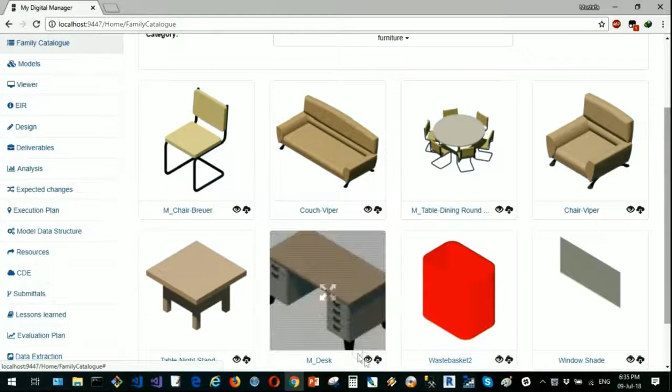So by opening the categories, we will now find a list of the categories that have been identified by the add-in from the RVT file. And if we go to the family catalog, we will find all the categories identified, and beneath them, all the families that have been extracted. And thanks to the Forge Model Derivative API, we can now extract the thumbnails directly from the families. And we can also use the Forge Viewer API to display the families.

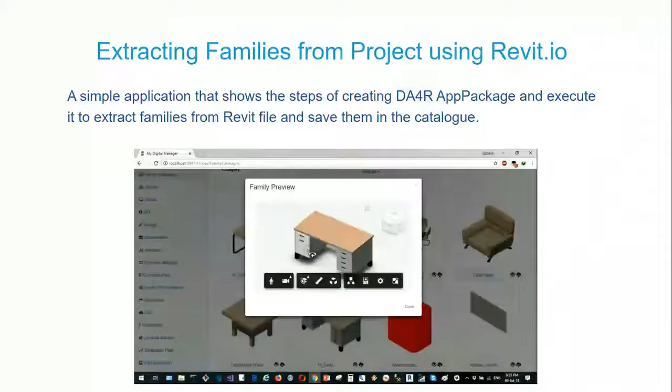So in order to get all the extracted families as output, we will put them in a folder, compress them, and then upload them into an S3 bucket. Once the upload process is complete, we will execute a Lambda function, and the Lambda function will start to extract the compressed file into a different bucket. And once the extraction is complete, another Lambda function will be executed to upload all the extracted families to a Forge OSS bucket.

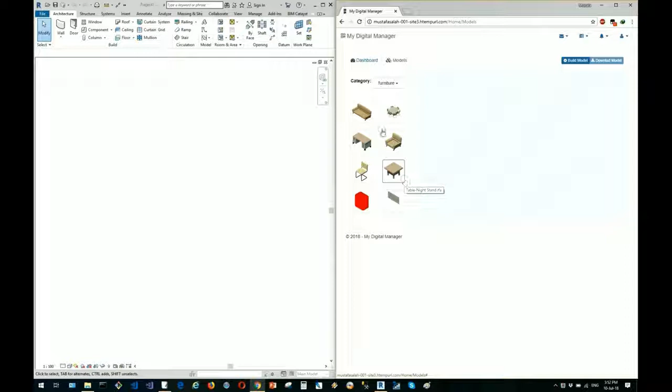So first we go to the categories and select the desired category, and then we will start to select the families that we want to insert in the template as samples. And as we can see now, we can directly put it in the Forge viewer, and the user can change the position and change the orientation of each instance.

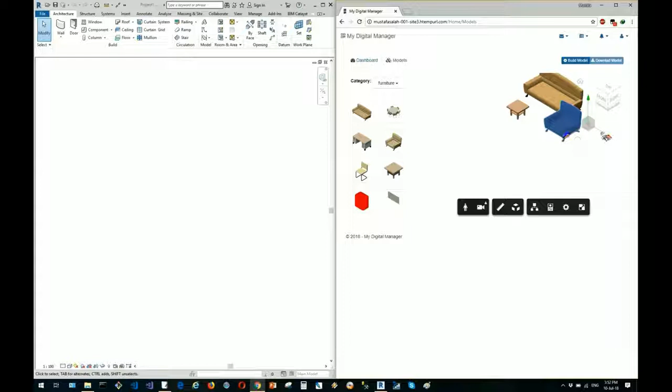And by that way, we can make sure that all the families are standardized according to the corporate standard. So we don't need to take care of the naming convention or the scale or the orientation of the 3D view thumbnail, for example. Now we trigger the work item that will create the RVT file on the fly and insert the family instance in the same location.

And once the creation process has completed, we are now ready to download the file. So we are now downloading the file. And we will open the file in Revit for more verification.

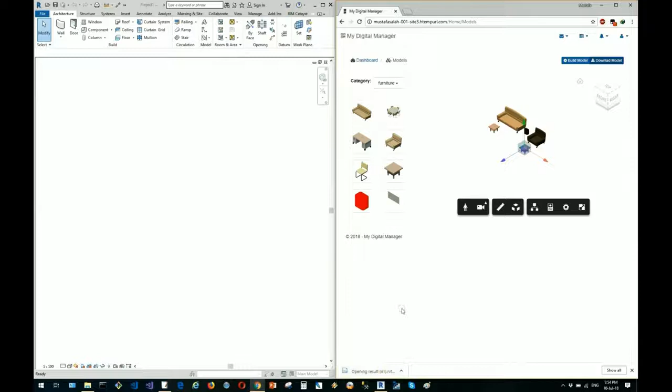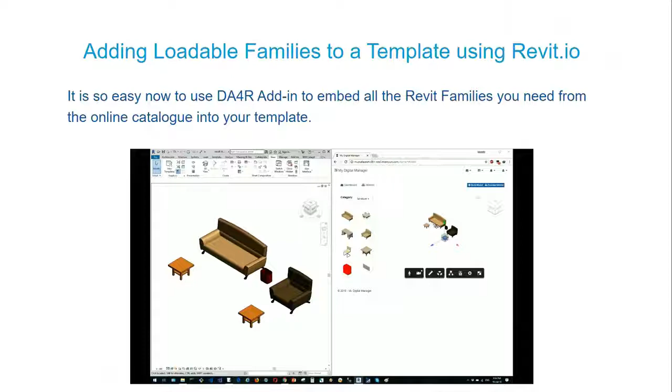Okay, so in this application, we will talk about the most annoying task when we are starting up a new Revit project, which is defining the new system families types. Now with using Revit.io, we can easily define new system families types on the fly. And we will show this in this demo. And by creating the system families using Revit.io, we guarantee that all the system families types will be centralized in one location, and it will be easily maintained and updated.

So as we can see here, we can now create walls, floors, ceilings, and roofs. And I will go for creating a wall type. First, we need to supply the wall type name, and then we configure the structure of the layers. So we select the functions, the materials, and insert the thickness. And then we can even change the order of the layers.

And by the way, all the information we have seen here is coming directly from the RVT files. So they are not stored in an external database and then read when we are executing the application. Instead, we are using Revit.io to directly access the information from the RVT file on the fly.

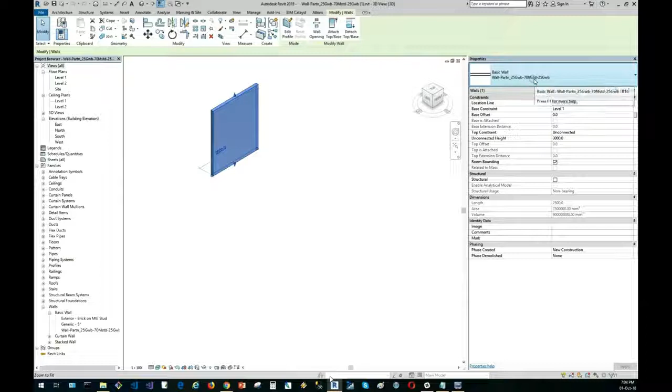So by selecting the wall, we can check the naming convention, and by editing the wall type, we can find all the structure of the layers that we have defined.

Okay, so now as we have a system families catalog, we can also use these families to create templates with samples of the system families. And this application has been done by Raul from the DA4R team. And we will see now how we can use the Revit system families to add samples to the Revit template.

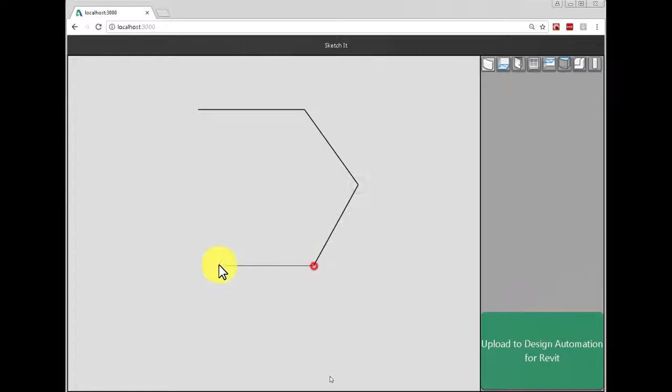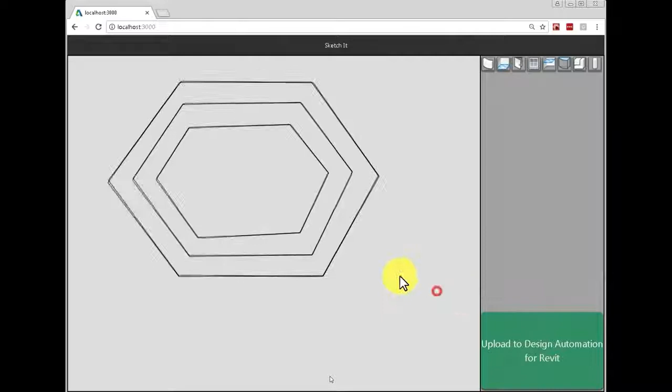So by selecting the system family type, we will go for the wall and start to sketch the center lines of the wall. And now we select the floor and start to sketch the boundaries. And once we finish the sketch, we will execute the work item that will create the Revit template and create all the model elements inside of it.

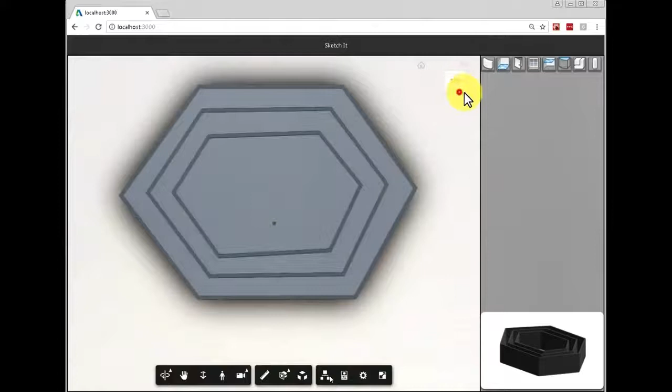Now the creation is complete, and we can display the result in the Forge viewer. And once we check everything is okay, we can download the file and open it in Revit for further verification.

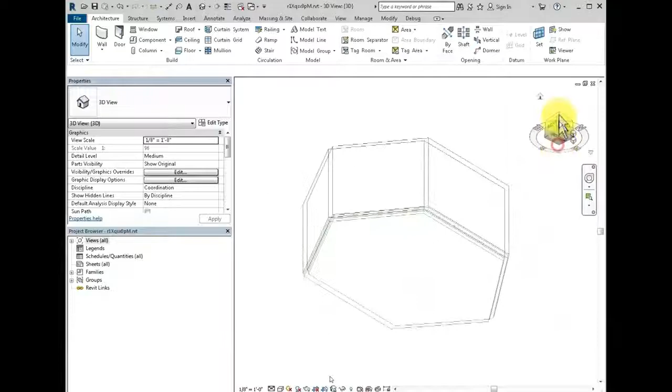Okay, so in this example, we have used Revit IO to make inquiries directly from the Revit models. To check the model health, there are a lot of indicators, and one of them is the Revit warnings. And by checking the status of model warnings, we can enhance the performance of the Revit model by solving the issues and minimizing the errors. So in our portal, we can now inquire the warnings directly from the Revit model and display them in different types of graphs.

This will allow us to have better insights about the model performance, and let us give notifications to the modelers to solve the issues indicated by these warnings. Or even better, if we could train some machines with AI, the machines can find the solution for these issues, or at least provide us with a list of suggestions for solving these issues.

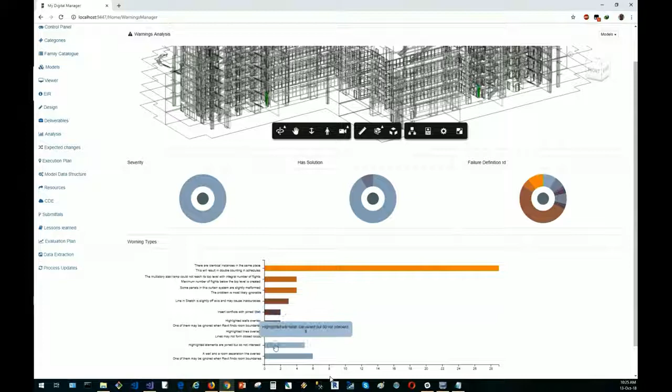So in our application here, we can group the warnings by their severity, or by their types, or if they have a solution or not, in different graphical shapes. And by selecting any bar chart or segment of the donut, we will be able to indicate the model elements that are causing this warning in the Forge viewer, and do further investigation in the Forge viewer.

This project is consisting of multiple segregated models for each discipline. And by selecting each discipline, we are executing the work item that will run the Revit IO add-in that will retrieve all the warnings from the model directly and then present them in the graphical format.

Okay, so in this example also I will show you how we can use Revit IO to digitally build a dashboard for our Revit content. One of our projects was a master plan project where the client needed to display visually the GIS information of some plots to help him take some decisions. Using Revit IO, we were able to directly extract the information from the Revit model, using a work item where all the GIS data were stored, and we recall all this information and display them in different graphical shapes.

The Revit file consists of multiple masses, and each mass represents a different type of building. And there is some set of shared parameters assigned with each mass to define certain values of the GIS information. So basically, this is our master plan, and initially it is color-coded by the main use. And each donut chart here is representing some criteria of the GIS data.

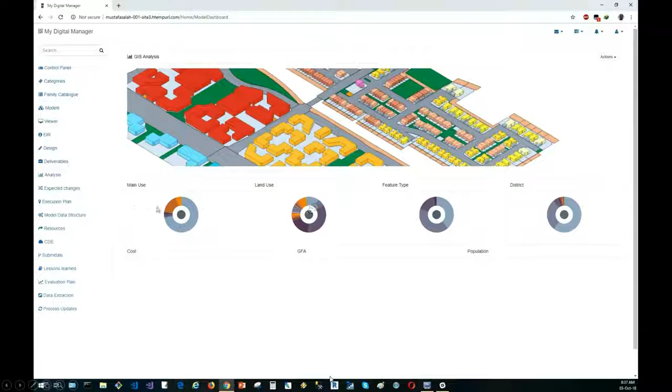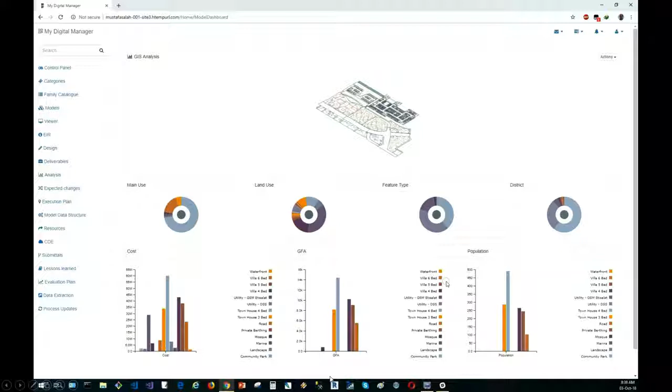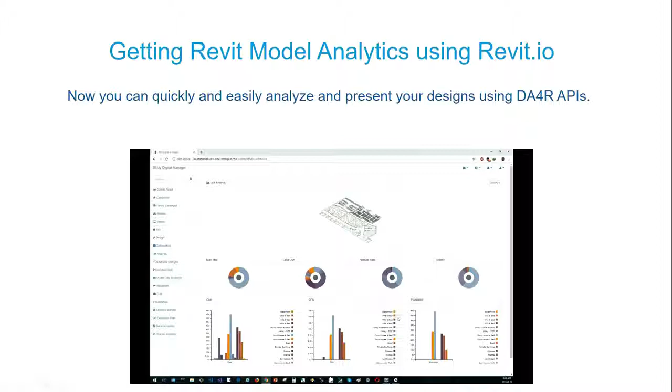And by selecting each sector in each donut, we will isolate and color code the model elements that are related to the value of the section. And we can even do more breakdown of the information in bar charts. For example, here we can see more information about the GFA and the cost and the population. And all this information is coming directly from the Revit model. These are not stored in an external database, but are read from the Revit model directly by using Revit IO.

Okay, so how many times did you need to sanitize your Revit content before or after delivering a project? I think this was a very annoying task. Maintaining the models and keeping them healthy is very important to ensure the consistency of the project and its robustness. So this is why Revit IO plays a great role, in which we can manipulate the Revit project to verify that we met the corporate standard to keep the model as healthy as possible.

In our example, we have created a set of criteria as a checklist, and for example, we will find some regular tasks like opening the Revit file with the audit option selected, deleting all the views that are not inserted in sheets, deleting all the sheets that are empty, or removing all the groups and rooms that are not located. And finally, we can save the project with the compact option selected, so that we guarantee that the model will be healthy and we minimize the storage space.

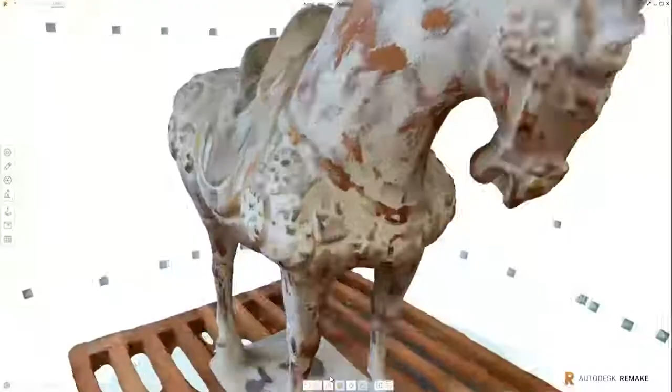Photogrammetry is the process of creating a model with textures of existing objects or spaces by shooting many overlapping photos from different angles. ReMake has a fully automatic 3D reconstruction engine. All you need to do is upload all your photos, and it does everything to create a textured model for you. To shoot better photos for photogrammetry, it's important to understand some of the basics of how the photogrammetry process works behind the scenes.

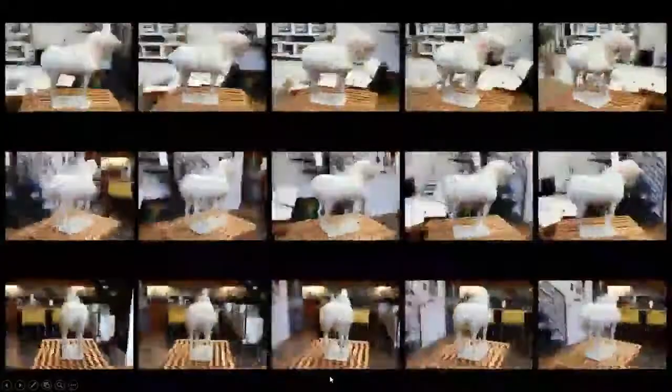Photogrammetry relies on feature detection. First, the software will go through all of your images and detect common points between any pair of overlapping photos. Many thousands of features will be detected in each pair with significant overlap. Using the 2D features in a pair of photos simultaneously, it is possible to solve for the camera and feature point location in 3D space.

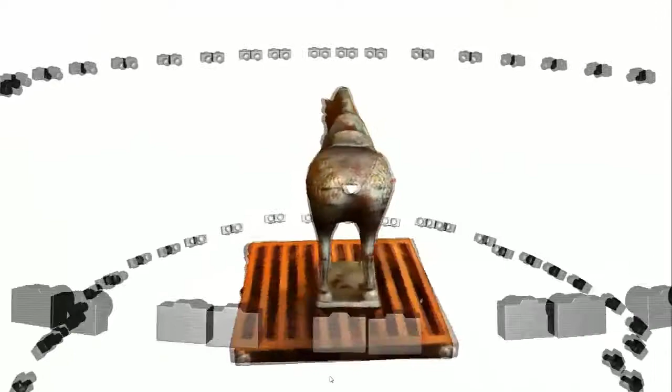ReMake simultaneously solves all pairs, creating accurate camera locations and surface points for all the photos submitted. Then it reconstructs the geometry and creates textures using the positions of the cameras. For feature matching to work, just make sure that nothing moves in your scene while you're shooting. Also make sure to get plenty of overlap between your photos.

So as we can see, we can use ReCap to generate the family's geometry automatically. By snapshotting the prototype from different angles, we can collect the images and then upload them to ReCap on the cloud. ReCap will generate the geometry, and then we can send the geometry directly to Forge with a set of parameters. Revit IO then does further enhancements on the geometry and assigns the parameters to the geometry. After finishing the processing, it will send the RFA file directly to the user.

In this slide, we'll talk about one of the most common mistakes that most modelers make, which is using high level of detail families in a stage where all these details are not needed. As you know, using an excessive amount of detail in a project will affect its performance in a very bad way. So by using a technology like deep learning, we can make the machines simplify the geometries of the Revit families and automatically create a library for LOD 300 families and LOD 400 families, for example.

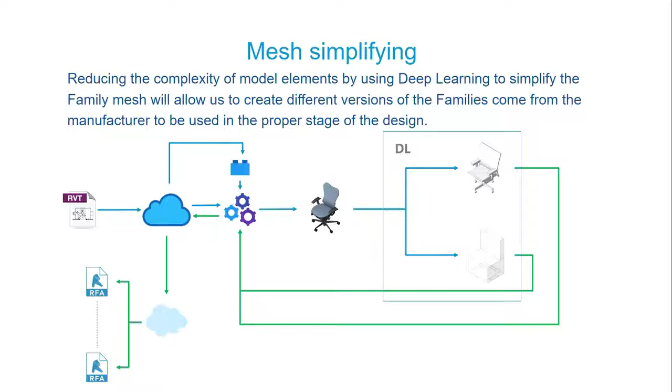Okay, so by using a simple machine learning algorithm with Revit IO, we can now do a lot of wonderful things. For example, by creating a classification system, we can make Revit IO able to recognize families of the same geometry but with different parameters. That way, the system will be able to do versioning and ask the user if they want to keep all the versions of the same family, keep only one version and delete all the others, or merge all the families into a single family.

Another example of using Revit IO with machine learning is that the machine will be able to understand the type of the project from the employer's information requirements, or the EIR. Based on this understanding, it will be able to decide which types of families are needed in this project, and then suggest to the user the families that should be included in the project.

Another example of using machine learning with Revit IO: if machine learning helps Revit IO accurately identify or classify the families, it will be able to accurately generate the BOQ, or bill of quantities, or the BOM, or bill of materials.